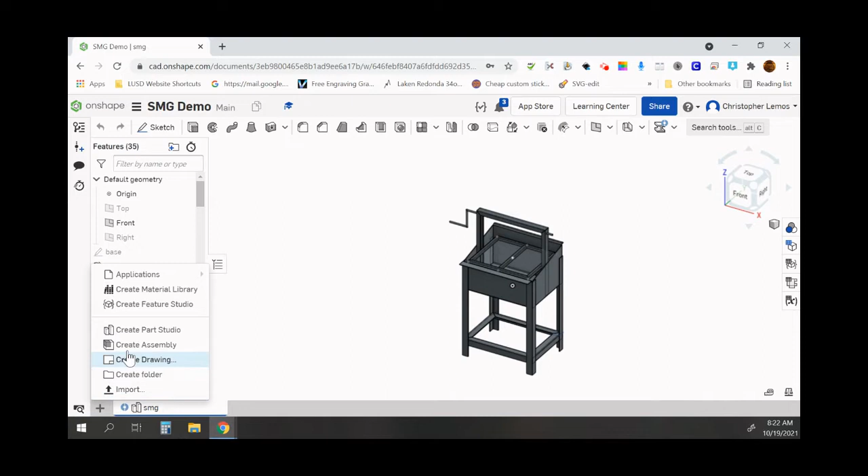So the first thing we're going to do is go down to the plus on the bottom left and create a new element, and we are going to create a drawing. It's going to come up with options for templates. Most likely, if you have not done this before, you're going to only have one, the ANSI A, which is the default template for OnShape. I have another one that I had to use for a specific project, but you'll select the template you want and click OK.

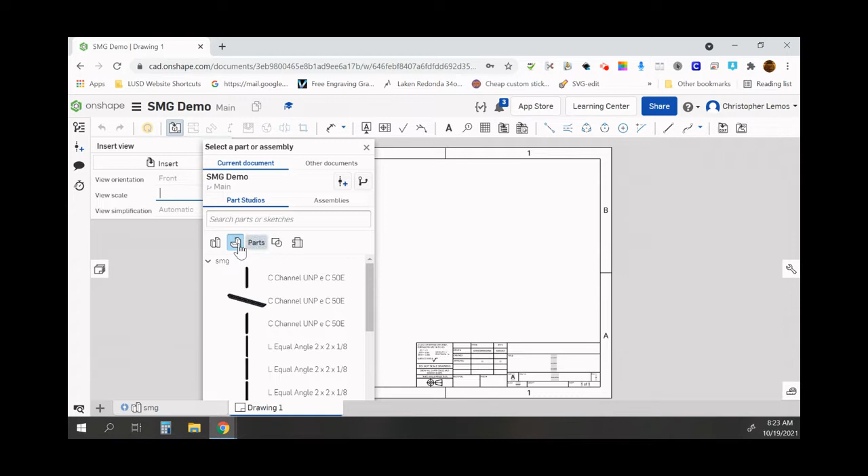The ANSI A size template is the perfect template for computer paper size-wise. It's going to automatically pop up with an insert view. So you have your parts, part studios, composite parts. You can select sketches and flat patterns. So we're going to turn off the parts and turn on the composite parts.

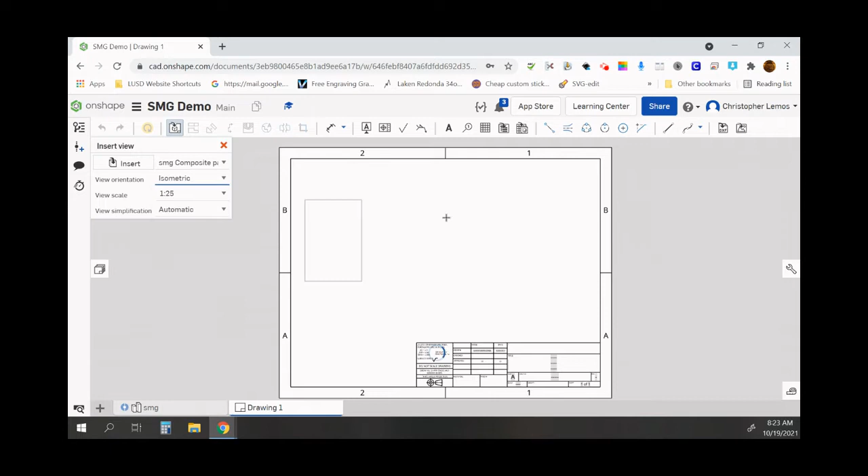So I want an overview for my first page of the overall project. I'm going to select composite part 5, which is the entire grill, and come over here and select isometric view. An isometric view, that's kind of looking at it from an angle. And I want to change the zoom as well.

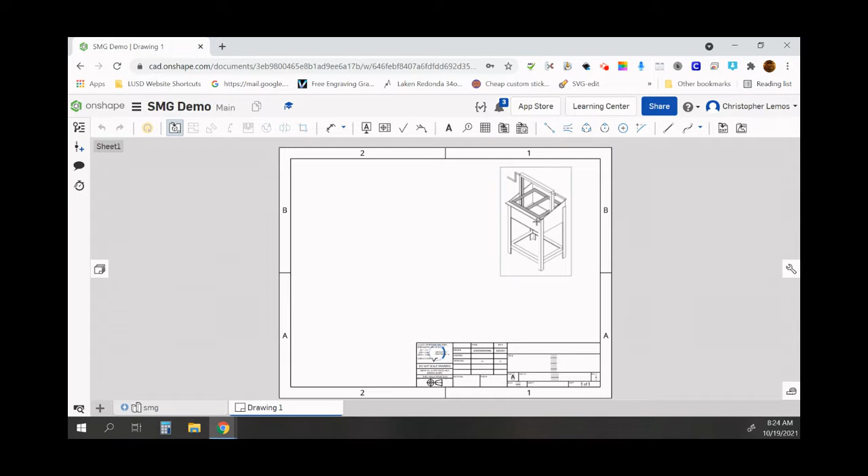I'm going to make this maybe 1:16, which is I think what I'm going to make all of my view scales. And that gets me a pretty nice size right there for this drawing. So I'm going to click and just drop that right there. And yeah, you know what? I like that where that's at.

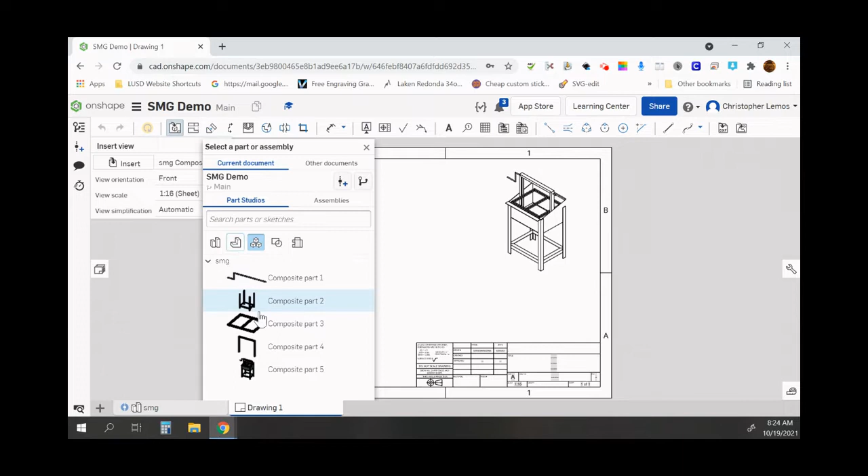Now I'm going to go and do insert view again because I want to put some other views of it. So I come up to insert views, this little icon up here. I'm going to select insert. It pops up with the selection menu. I'm going to do composite parts again. You don't have to turn the parts off, it just cleans it up a little bit. I'm going to select composite part 5 again, and I'm going to give us a front view.

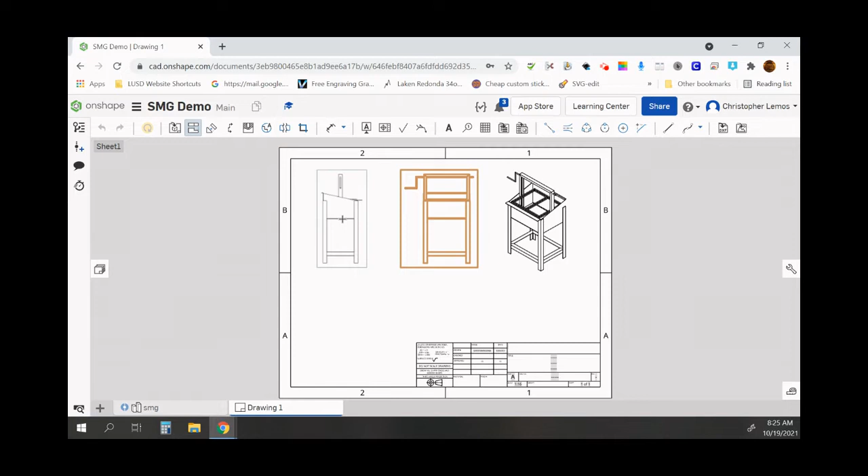And I'm going to space them out a little bit so that we have room to throw some dimensions on there, even though we're going to have some zoomed in views. Now, if you notice, it automatically wants to drop another view on there. Sometimes I like to do this, sometimes I don't. If you don't want it to automatically put another view on there, you can just hit the escape key and it'll get you out, and then you come back to the insert tool. But since I want a side profile view anyway, I'm going to go ahead and let it use the side profile view that it recommends.

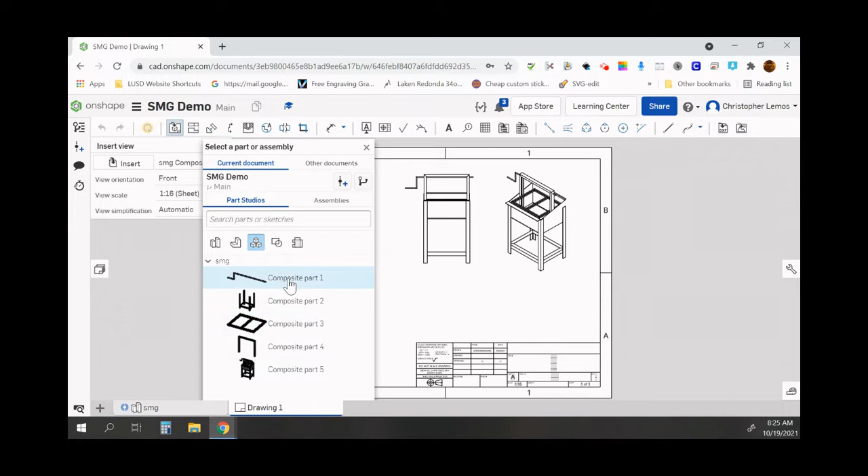Now I'm going to come back up to insert view again. I'm going to go insert and once again my composite parts. And now I'm going to start putting my sub-assemblies in there. So composite part 1, which is our crank, I'm going to take that and put a front view of it. See, it's already selected as a front view, so I'm happy with that. I'm going to drop that in right there.

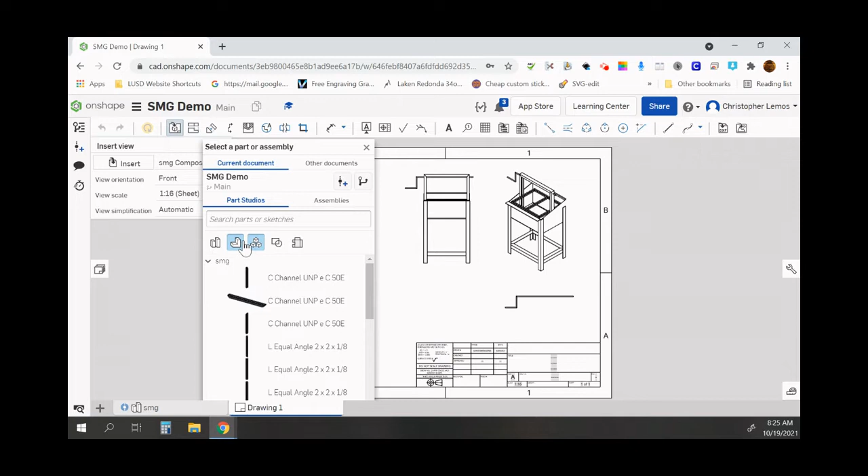Come back up to insert view again, find the composite parts. I think I'm going to do the bow, and once again I'm going to do a front view, and I'm going to drop that right here under my front view of the other. See, now it wants another view of the bow, but I don't want that, so I'm just going to hit escape.

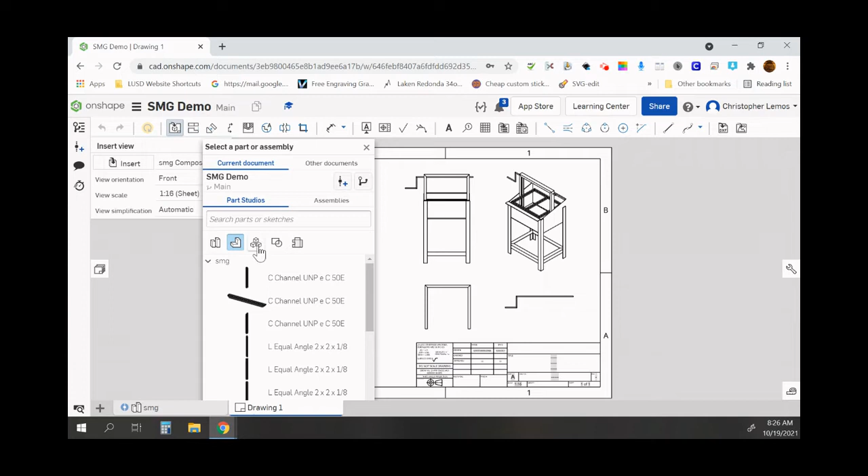Actually, you know what? I do want a side view of the bow because we need to see where to drill those holes. So we're going to go back up, insert view again. I'm going to select composite part 4, but I'm going to select a right view. Doesn't matter if it's right or left for what we're doing, and I'm going to put that fairly close to the bow there.

And let's see, what else am I going to insert? I'm going to take the grill, and I want a top view of the grill, I think is our best bet. And so let's go top, and I will put that - now I'm probably going to put it right here. Just click to drop it. I don't need any other views of the grill, so I'm going to hit escape.

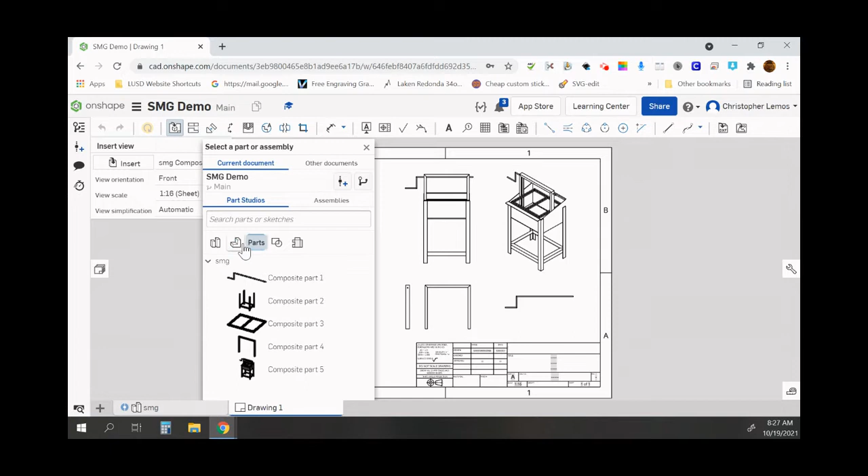Then we're going to come back here again. I'm going to go insert, composites, and I'm going to do composite part 2, which is the base. And I think I want a top view of that.

I'm also going to put it, I'll probably make it a side view.

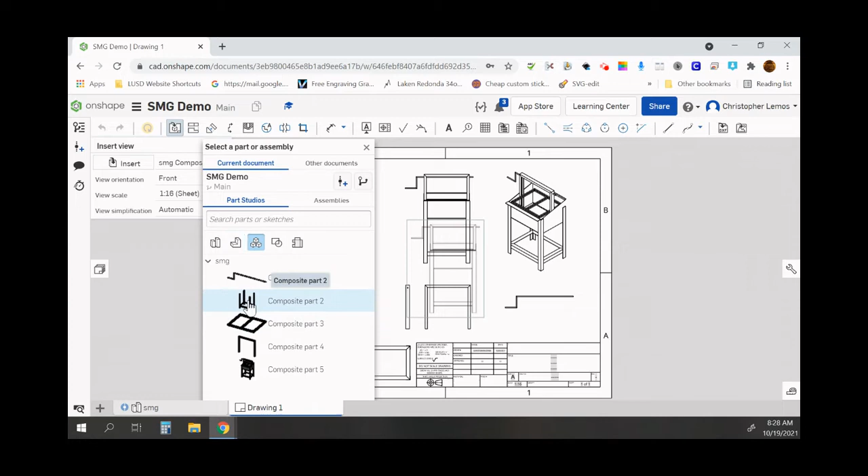Okay, so I've got pretty much everything I need on here, with the exception of the tub of the grill. So to do that, I'm going to come up here to the sheets, and I'm going to add a sheet, which you come up here to the top. So this little icon here on the side opens up. It's essentially showing all the, so we have one sheet and it's showing all the parts that are on there and the views of those parts.

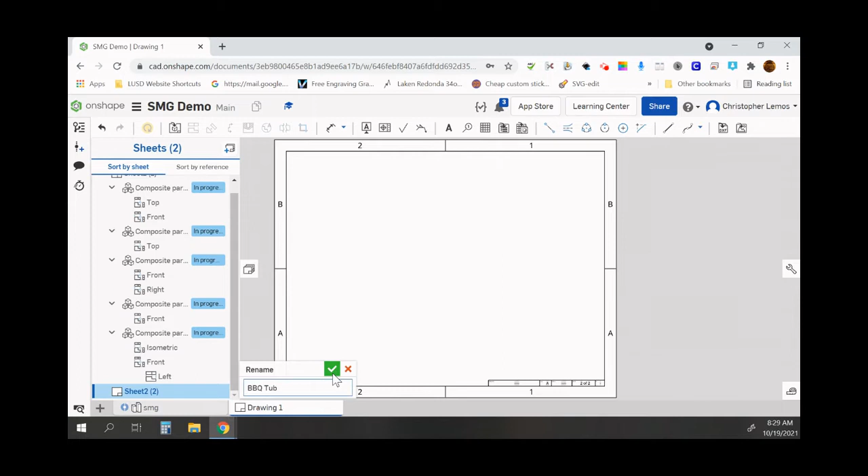So now we're going to come up here, we're going to insert another sheet, and you could name these if you want to. You just right click on them and rename them. So I could call this one tub. I usually call it a tub for lack of a better word for it. Barbecue tub is what I'll call that sheet.

And I'm going to come back up here. I'm going to get rid of that. It's just extra clutter, I don't like it. So I'm going to go insert, and I'm going to turn off those views. And I believe that we're going to go flat patterns.

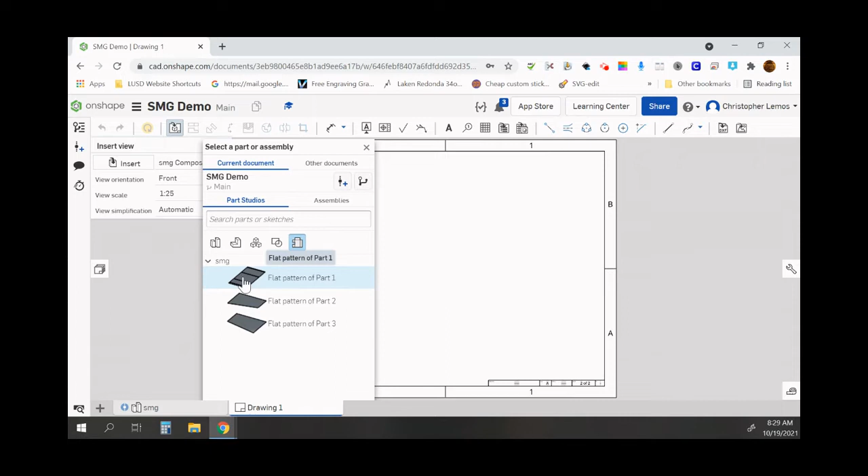Okay, so the flat patterns of this, we're going to go and have, we'll select this one first. And I'm going to select, see what 1 and 12 would look like. Yeah, I'm going to do 1 and 12 since all we're putting on here is the sheet metal. So we're going to go with that.

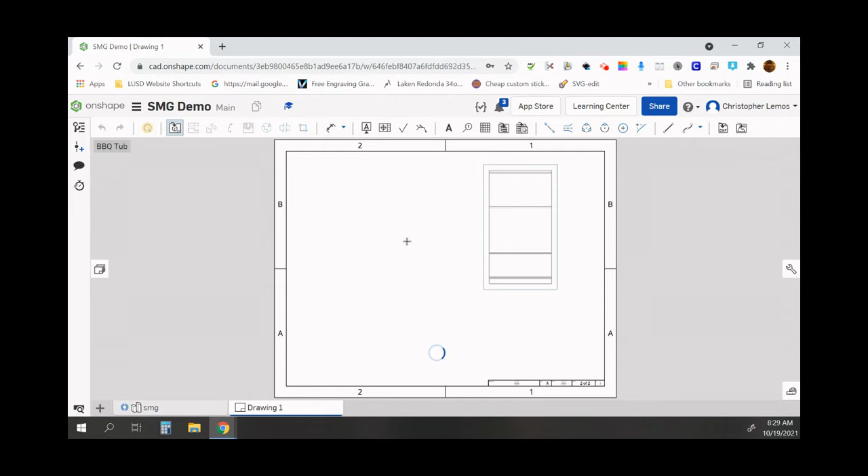And so this tells us what all of our bends are going to be for that sheet metal, which is really nice. And then I'm going to go back up here again, and we're going to insert our flat patterns, and we're going to put one of the sides on here.

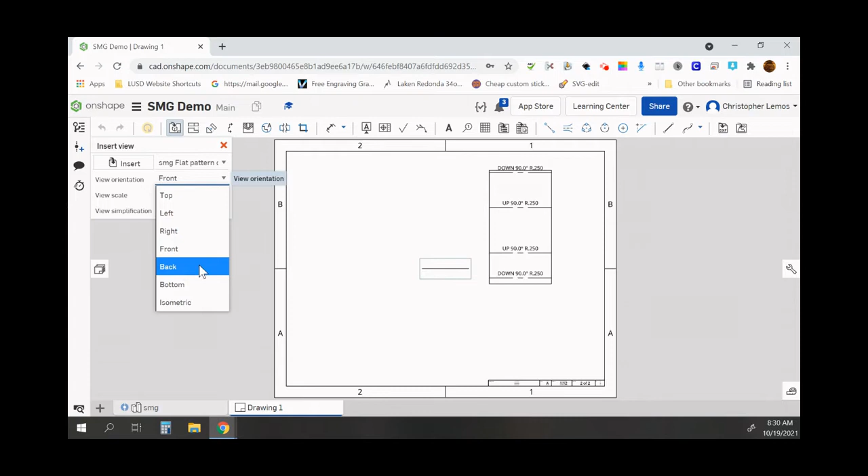And we don't want the top. We want, I think it would be the left. No. Front. How did we draw it? I don't remember. Nope. Oh, it would be a back view because they're saying it's not in relation to how it is on the grill itself.

It is what it would look like as you cut it out of a sheet. So we'll go ahead and we'll put that on there as well, which it's kind of funky. It shows up upside down, but that's okay.

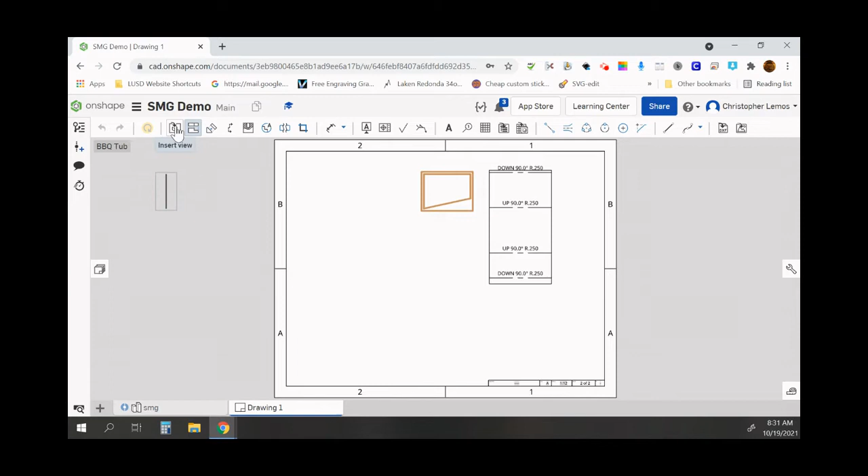And then I want to see if, I don't know if we need to make a composite part to do this or not, or if it'll show up. Okay. Yeah, so I'm going to take an isometric view of that piece folded. And so I want to make this isometric.

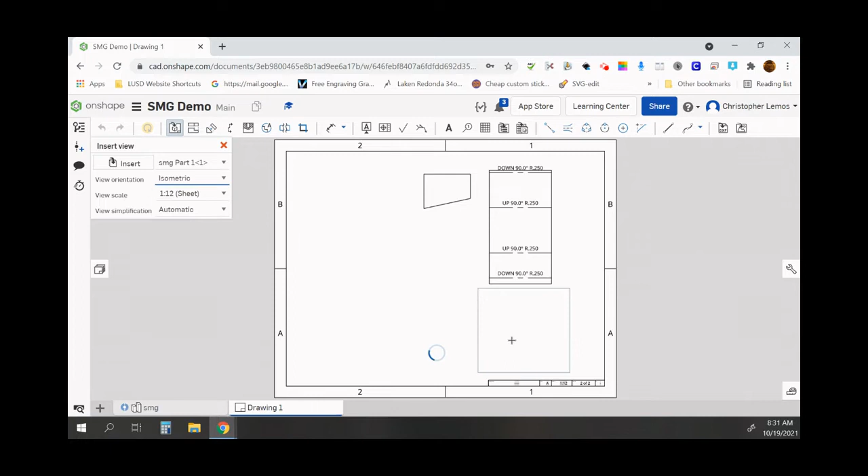So, and I'm going to put it right under the piece that we're going to fold. So that gives you an idea of what this is going to look like.

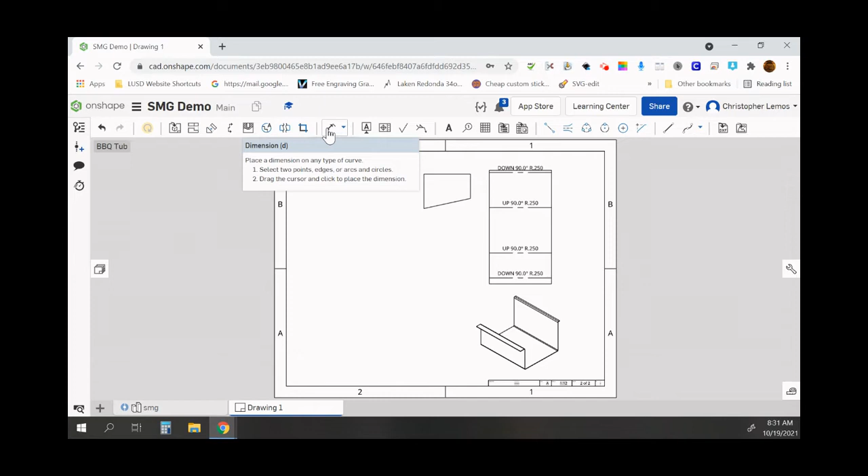Okay, so now we're going to have to start plugging in dimensions. And since I'm on this second sheet already, we're just going to start here. So you come up and you select your dimension tool, which looks the same as it does in the regular OnShape. So we're just going to go and start clicking, dragging, and dropping our dimensions in there, which is done the exact same way as it's done in OnShape when you're drawing up a project.

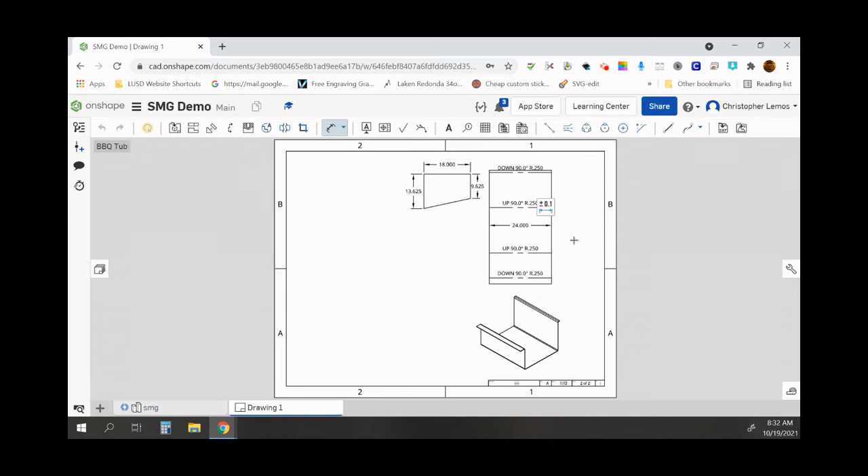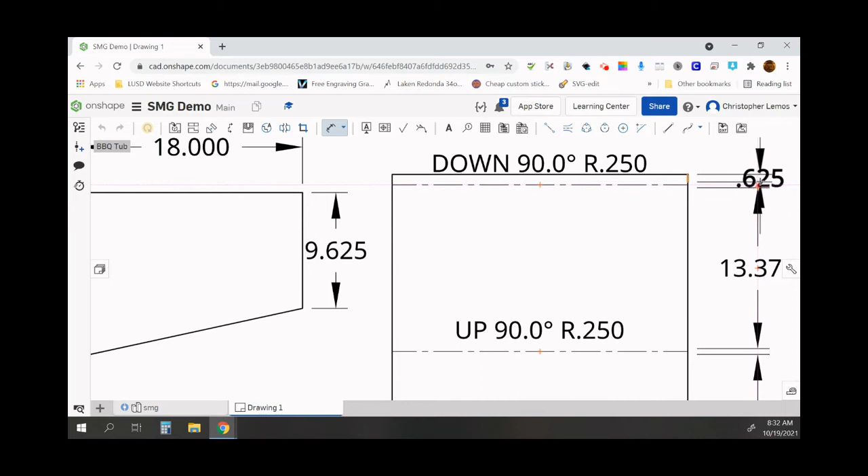Okay, so that's all the dimensions I need for that. I'm going to go and show it like that. 24 inches. Zoom in a little bit.

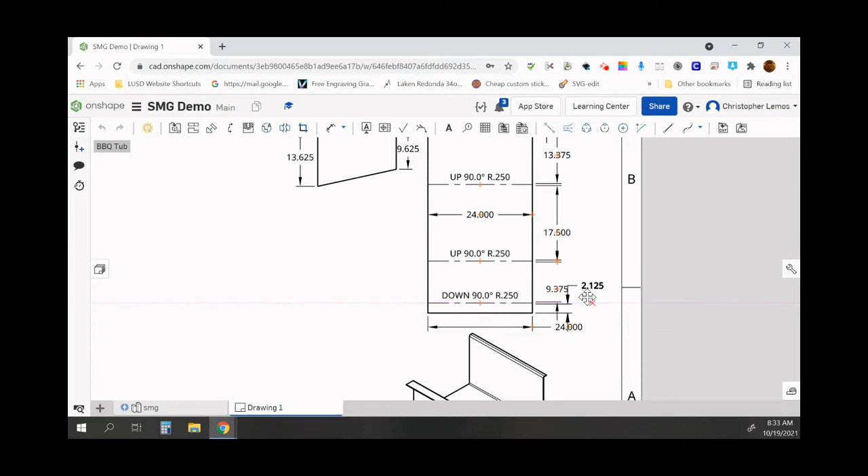And once again, now I'm just putting in all the dimensions that I think someone would need. I don't like where I put that. I'm going to, it won't let me do it, won't let me move it. Hit delete, no, all right. There it goes. Let me drag it, and I'm going to put it probably like that so we can see.

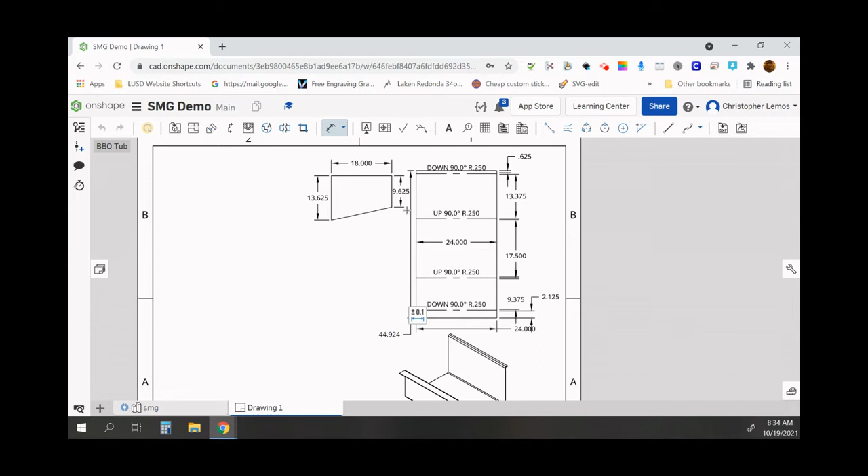And then I'm also going to put an overall end to end dimension. So I got out of the dimension tool. I need to get back in the dimension tool there. And so I'm going to select the outside piece there, outside piece there, and I don't like that, yeah, there. I'm going to do it like that, because I wanted to avoid having this arrow go through the numbers there. It just, to me, clutters things up.

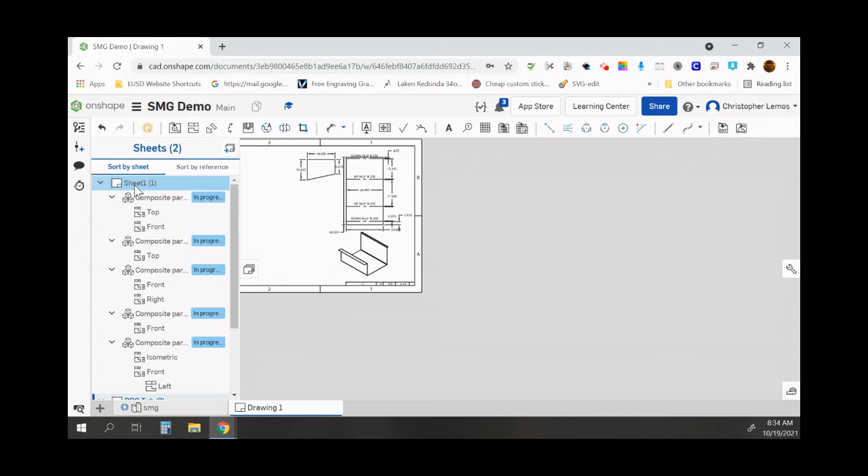Okay, and I'm not going to put any dimensions on the isometric view. The sides are both the same, so I only need to draw one side. So I've got all the dimensions I need on this sheet. So now let's go back and look at the other sheet. I'm going to go back to sheet 1. And so now I'm in sheet 1, and I can start throwing dimensions on this.

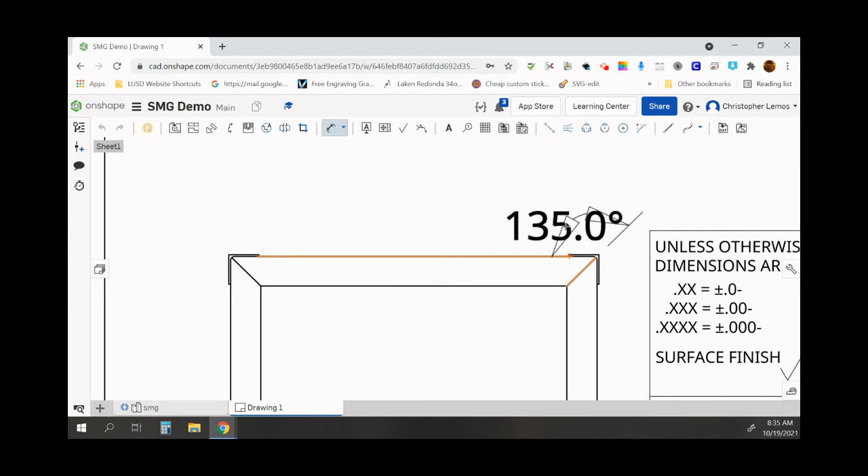So once again I'm going to get dimensions, and it should be obvious that we're talking a 45-degree angle here. I'm just going to go and draw it.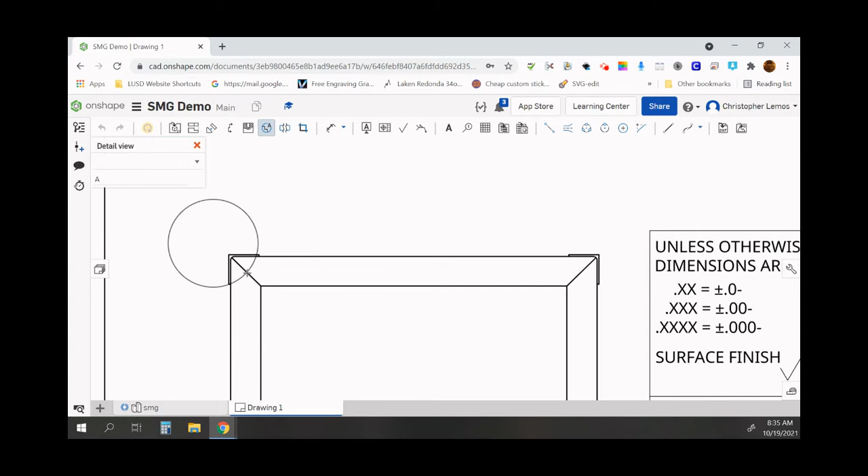You know what, let me get out of that. I'm going to do a zoom in of that area, a detailed view. So I select detailed view, I drag a circle around the area I want to detail. I didn't like where I stuck that there. There we go, that's a little bit better. So now I've got a detailed view of that, I can go and stick it right above, like that.

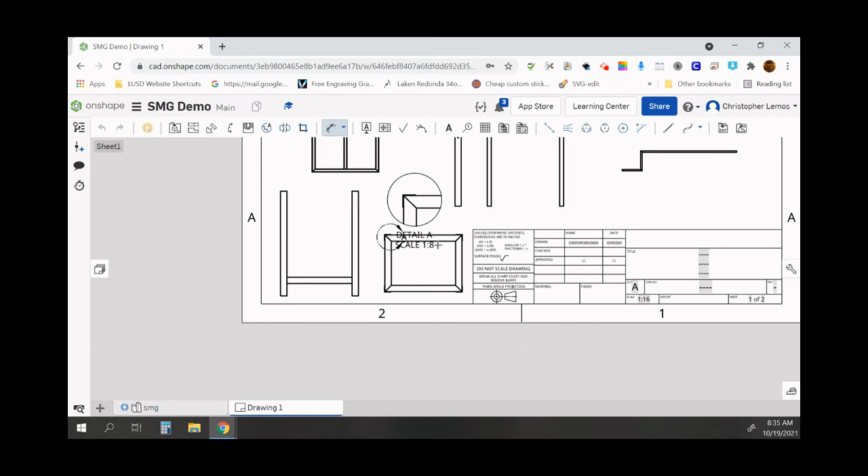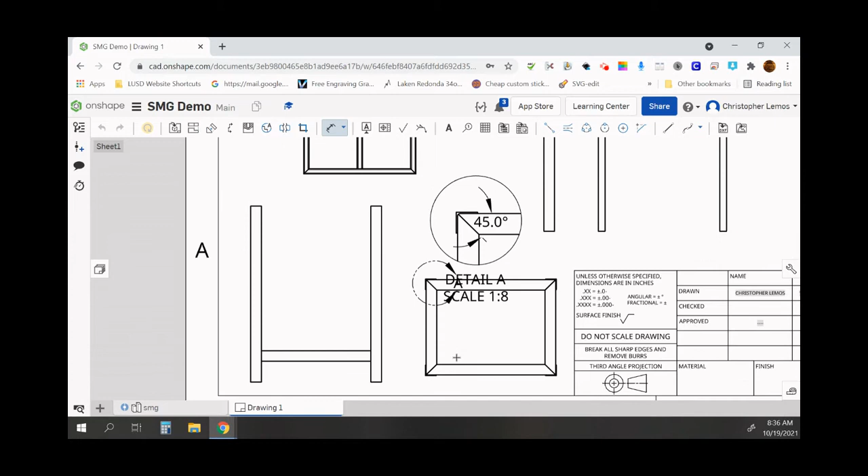And then I can go and hit the dimension tool again, and I can do that, and it shows that it's a 45-degree angle, which should be obvious given that I've got a square with 4 angles, but I'm just demonstrating how to do various things in here.

So I'm back on the dimensions again, and we're going to put how far apart we are from here to here, which is 24.25. And we're going to do the same thing from here to here.

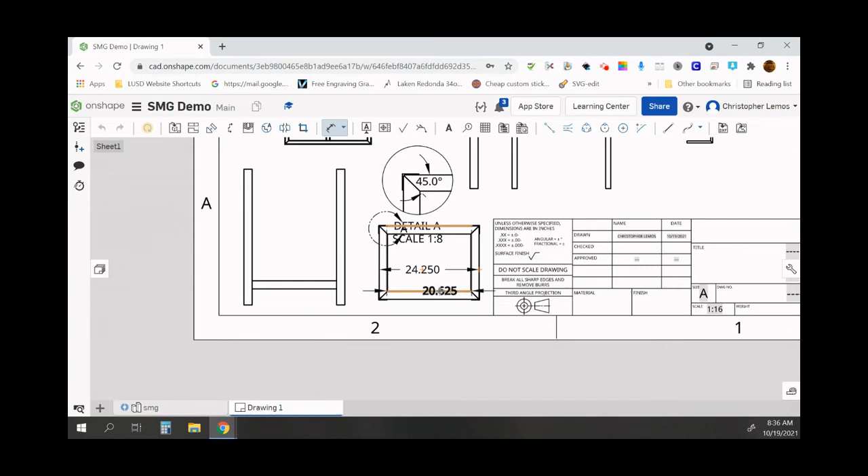Whoops, I'm not sure what I got. Oh okay, I'm going to escape, I ended up selecting the wrong thing. Anytime you hit escape, you need to go back into the tool you were in before. So we're going to do that. There we go, 18 and a... keep clicking on the wrong thing, it keeps switching my selection.

Let's zoom in a little closer that way. Okay, there. You know what... there we go, did what I wanted.

Let's see, we needed the height of these legs, which is 33 3/4. We're going to need the height of this, 23 3/4, 24.

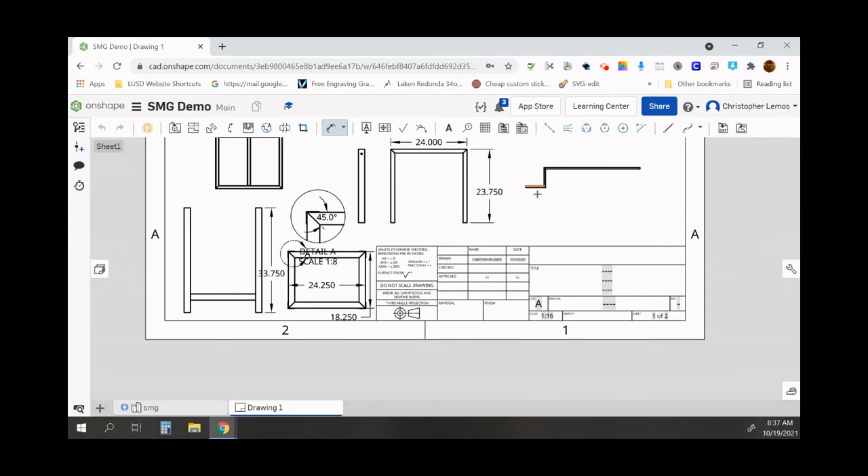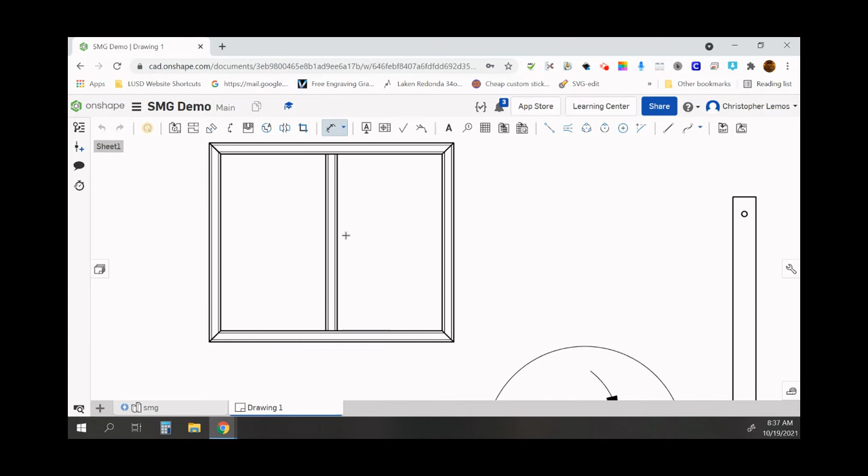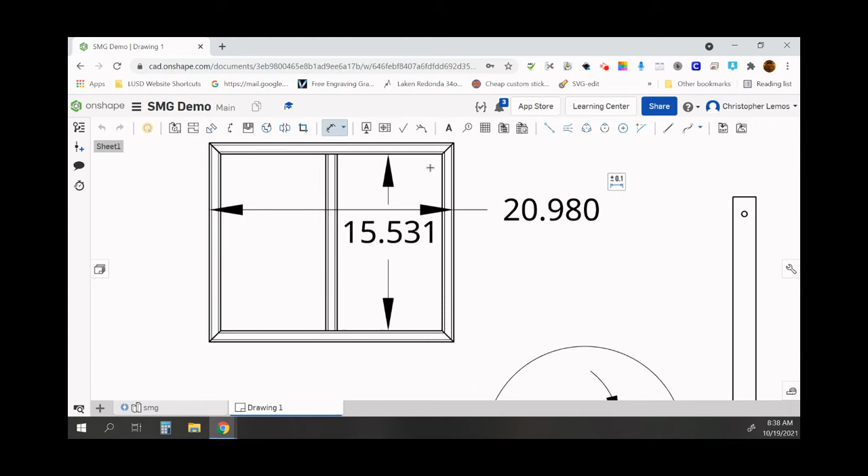We're going to need the distance from here to here, and distance from here to here. Okay, other ones we need, our distance from here to here. We need our distance from outside to outside, and our distance from outside to outside. I'm going to stick that on this side here.

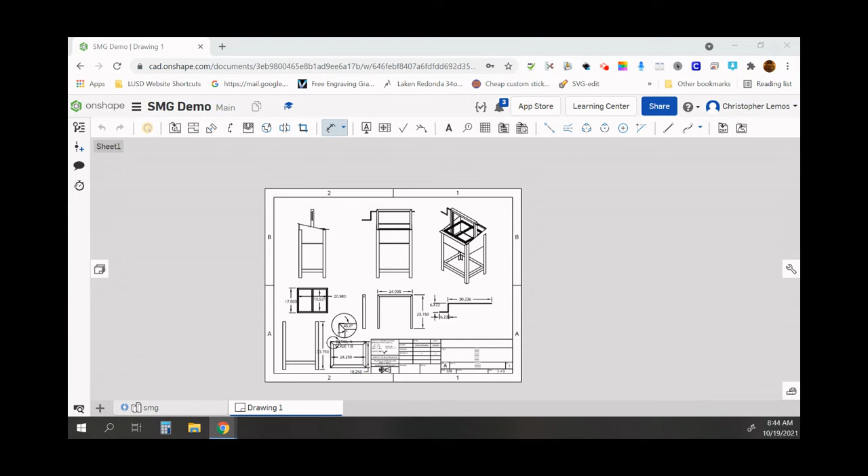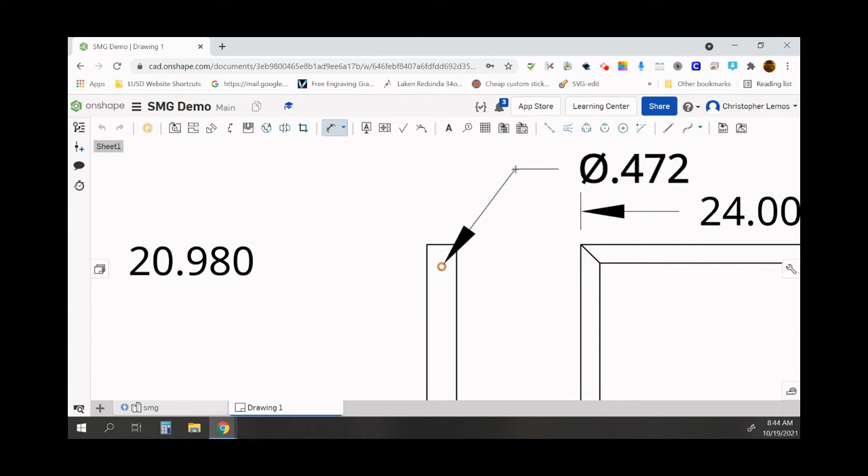So we're going to do two things here. Let's zoom out a little bit. We're going to go and... you know what, I take that back. We're going to do a detailed view again, same as we did on the other. So I'm going to drag that like so, click, and I'll put my detailed view right up here.

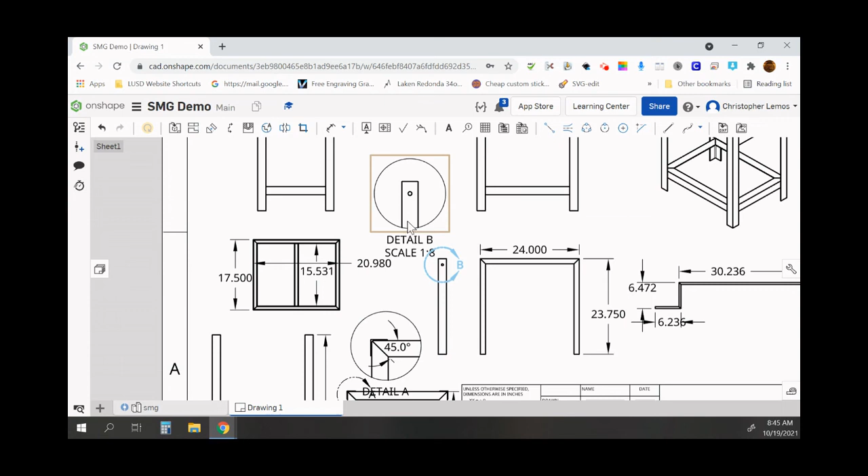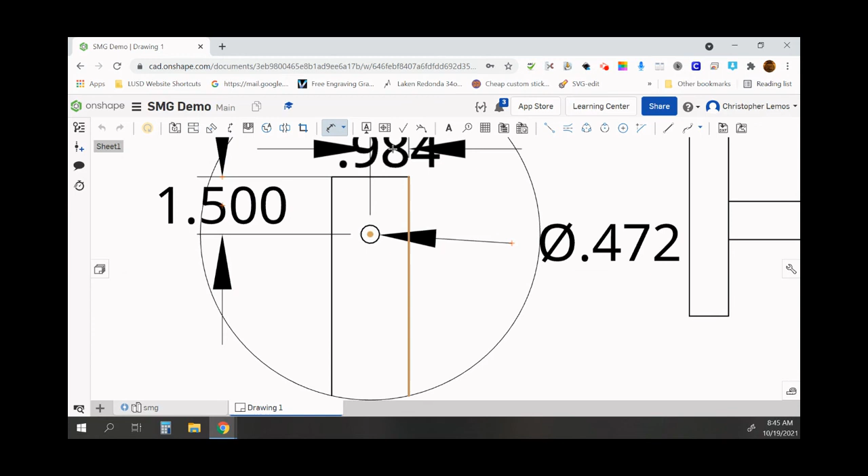And I am going to then go back to my dimension tool, and I can show these dimensions more clearly with the detailed view. Okay, so I go like that, and now I've got all of the dimensions, I think, that I need to build this barbecue, really.

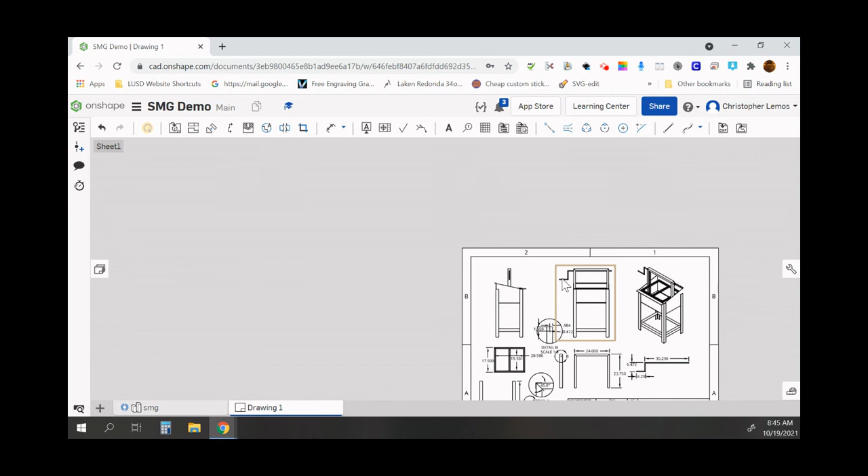Anything else I can figure out by looking at this, as long as I have a list of what type of materials I'm using. So for example, we would generate a cut list or a bill of materials that would tell what size angle iron we're using, what size channel iron we're using, what size rod we're using for the crank, and so on and so forth.

Okay, so now that we've completed our drawing, we're going to come down here if we want to print it out, export it. Well, actually before that, you can go in here and put titles. So I could come in here and call this... it's a Santa Maria grill, so I'll just put SM.

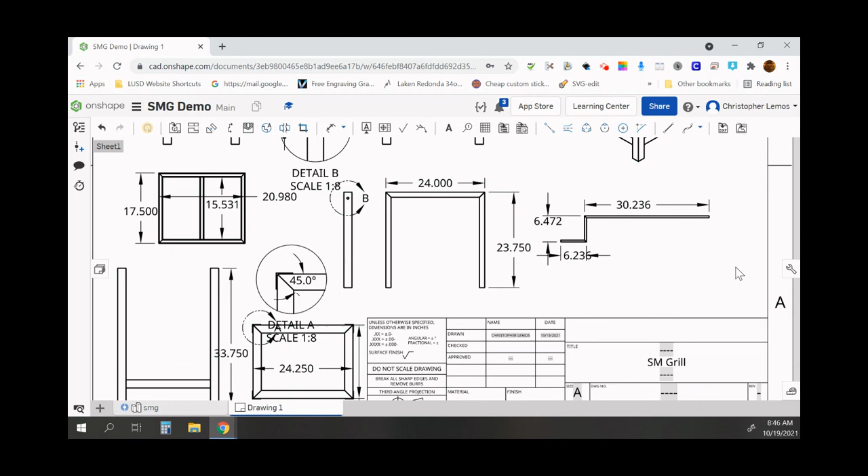Grill, green check, and so now it's in there. It automatically will have your name and the date that you made the drawing.

And now we're going to go and print it off. So right click, export, and you can name it SM Grill Draft 1. And you can select different formats for printing it off - PDF I find to be the best, and normal black and white, so forth.

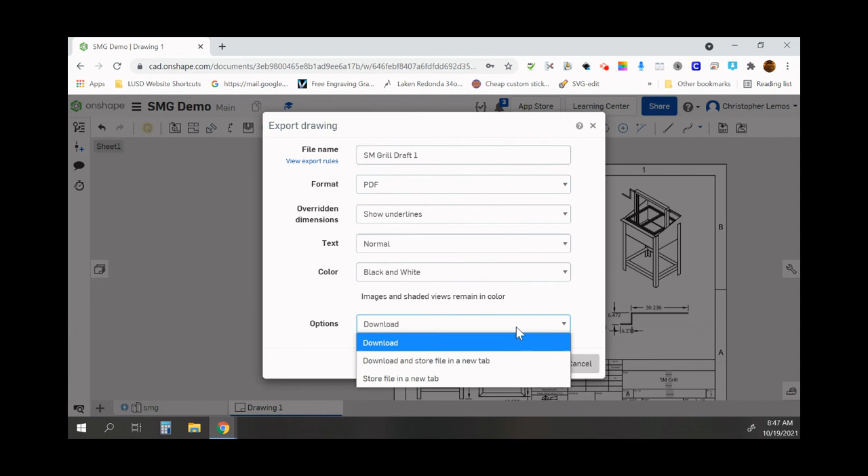You can download it - I'm just going to download it, so I click export, and now this is preparing it for export. It takes a second for the computer to compute it all, and in a moment it should show up as a download. See, it shows up as a download at the bottom of my browser. And so now that is in my computer's downloads folder, and I can print it out, email it to someone, or do whatever I want with that document.

And then if I want to edit it, I can always come back into Onshape, make my changes, and then generate another export.